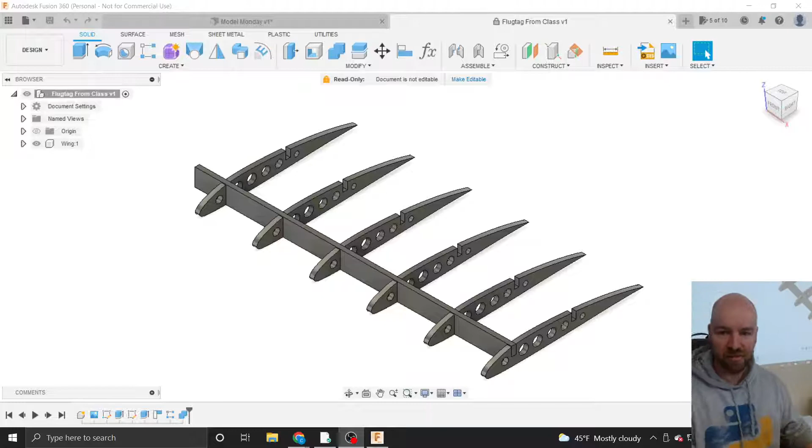Our project, which is part 2, the last part of our Flugtag wing design progress here. If I zoom out, you can see the beginnings of our wing. This is what we've got so far, where we ended up last week. This week we're going to finish making the second spar, make a wing covering, and then hopefully we'll have time to make the other half of this wing, because we've only got half of it drawn. Next week we'll start a new project.

So let's go ahead and jump right in. I'm gonna grab my Flugtag class project here, and we're going to go ahead and just get started. Sorry, did we have a question? All right, cool, so I'm going to go ahead and start.

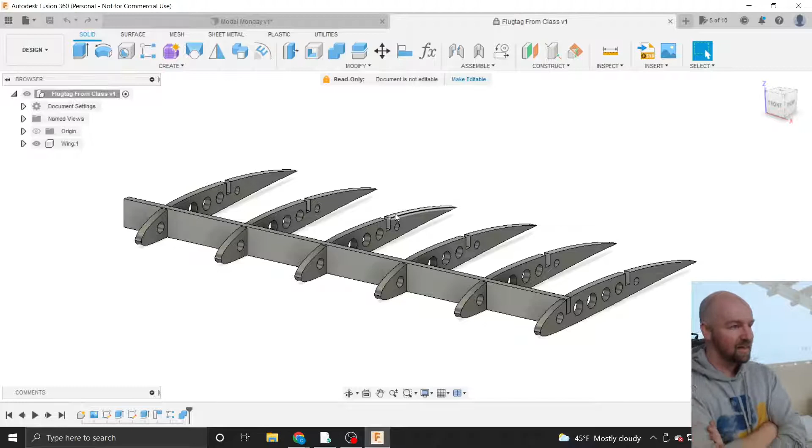Like I said, we're going to start by drawing the second spar, the rear spar for our wing section here, and we'll do that the same way we drew our first spar. So if you remember, we've got our wing component here. I'm going to go ahead and make my wing component my active component, that way any sketches or bodies that I make will end up inside of this wing component.

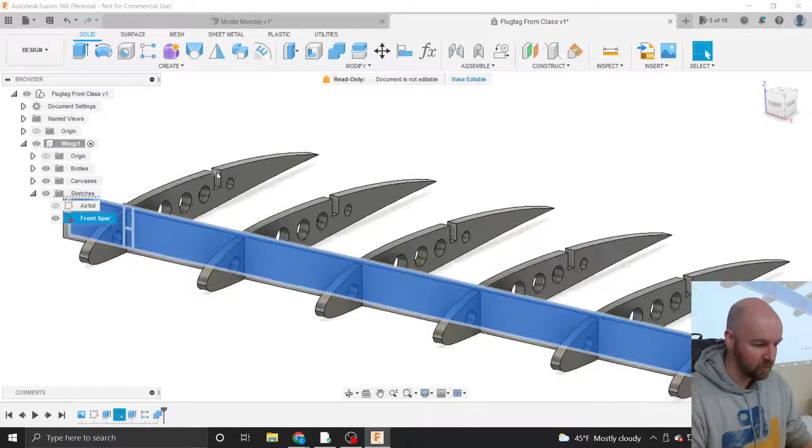I'm going to spin down and look inside of my canvases folder. I thought for sure I'd have a construction folder, but I do not. So we're going to go ahead and make the second spar the same way we made our first spar. Our first spar we just made as a drawing on one of these surfaces here, and we'll do the same thing here. So I'm going to go ahead and turn off my front spar.

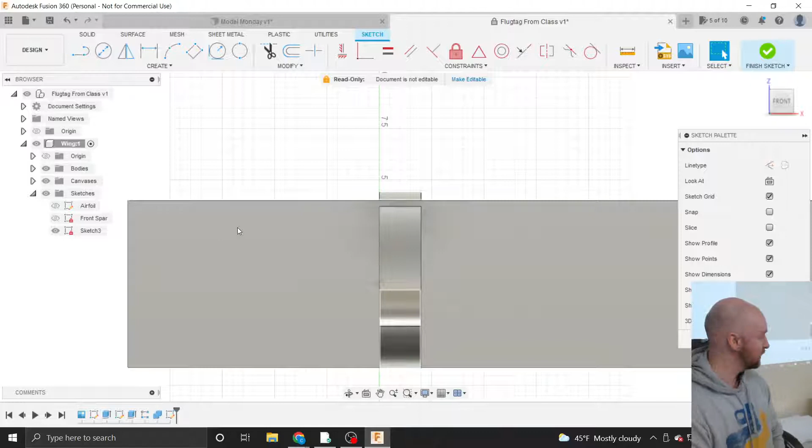To create a new sketch, I'm going to click on Create, and then Create Sketch. I'm going to hover over and choose one of these that doesn't have an origin floating right over it. There we go. If I zoom in a little bit, my origin was kind of covering the surface that I wanted to click on, so I had to zoom in so I could see the surface more clearly. If I choose that surface to draw on, it's going to spin me around so I'm looking down at that surface.

Now, I can't really see that surface because it's behind all of these bodies. So what I'm going to do is turn off the visibility on my front spar, which will make it a little bit easier to draw here temporarily. And I'm going to spin around so I'm looking at this a little bit more three-dimensionally.

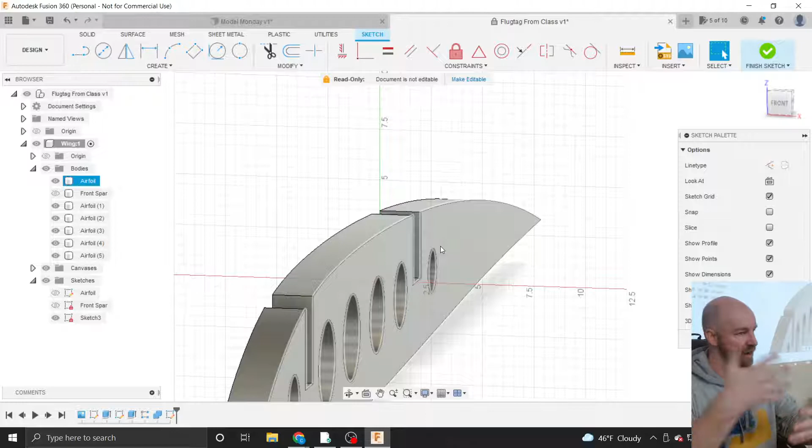What I'd like to do is take some of the existing geometry that exists here on our airfoil and project it over onto this drawing surface we're drawing on right now. I can do that with a command inside of our Create menu. If we scroll down to Project Include, and then that sub-menu that pops up, we're going to choose the Intersect command. One of the great things about Fusion 360 is it's got lots of tooltips.

So if you're not sure how to use a tool, these tooltips, if you just stop moving your mouse, will show you what it does, like projecting points or model edges. Oh, I clicked before I could finish reading. Face, is that right, on the back? I'm actually going to select the entire body.

I'll scroll over to this intersect option, and the default selection filter in this intersect window is set to specified entities. But if I change that to bodies, now I can project the geometry from this entire body all at the same time. So it'll bring over all the edges and points where this three-dimensional shape intersects with this imaginary sheet of paper, if that makes sense.

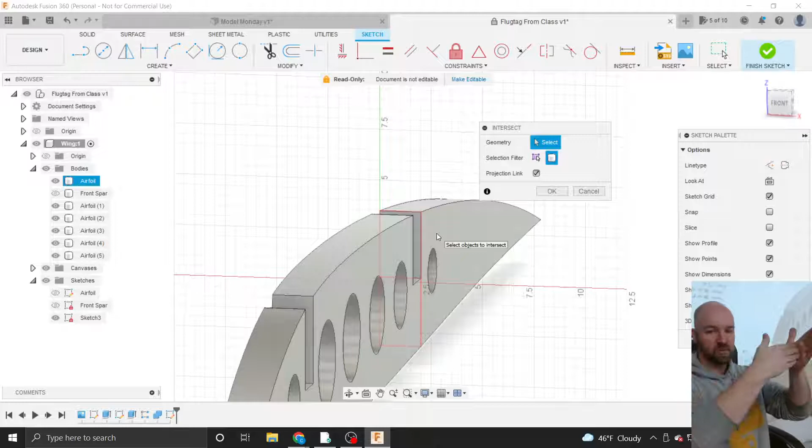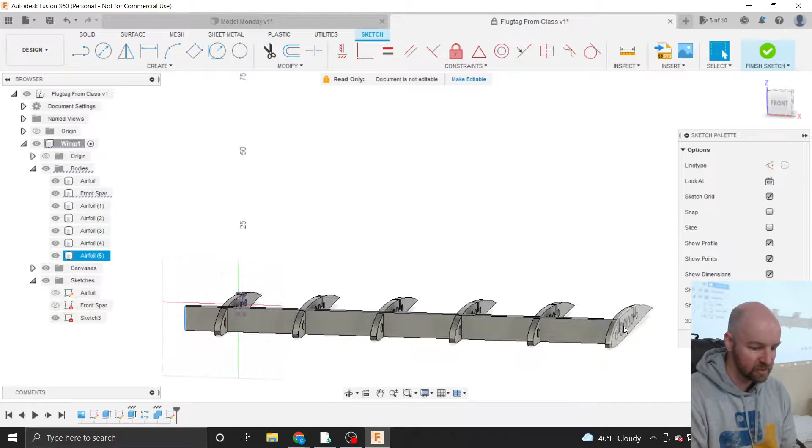So if I choose that body there as my geometry, and say OK, now I have all that geometry from my airfoil over there. I just need to get a little bit more geometry here. I already have this front spar that extends out a certain length near the middle of my craft, though it doesn't really extend out near the end of my craft, but I can use that existing geometry to project over the end points of what will be my rectangle.

I'm going to do that now, using that project command again. So from Create, I'm going to come down to Project, and then instead of Intersect, we're just going to choose this Project option.

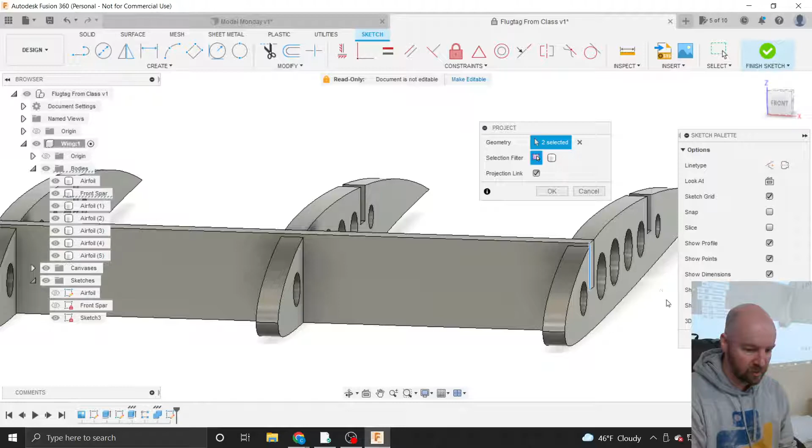If I choose this project option here, what I want to project are the ends of my wing spar. The center of my wing will be right here after we mirror this over later. So if I choose one of these edges here, it projects that line back. If I zoom out and zoom in on my other side, I've got another edge of my wing spar. That's kind of superfluous since it's right on the edge of our wing, so it's not really a necessary projection point, but it'll be handy. We do need to have some sort of end.

So do you project and do that on each side? Yeah, on each side.

Once we've done that on each side, I'll click OK, and then I'll show you if I turn off my bodies. I just turned off the visibility on my bodies, and now we can see just the projected geometry I've created.

This section here was where the airfoil existed that I projected over, and then this is one end of my spar, and that's going to be the other end of my spar there.

Now I just need to add a little bit more here. I need to draw a rectangle that will encompass the same width as my spar height at this location and the right length. I think I'm going to do this all using constraints, because I don't know how long this is, and I don't really know how wide this is. I guess I could measure, but it's easier to do this using constraints.

I'm going to grab from my create menu, and come and grab this 2-point rectangle option.

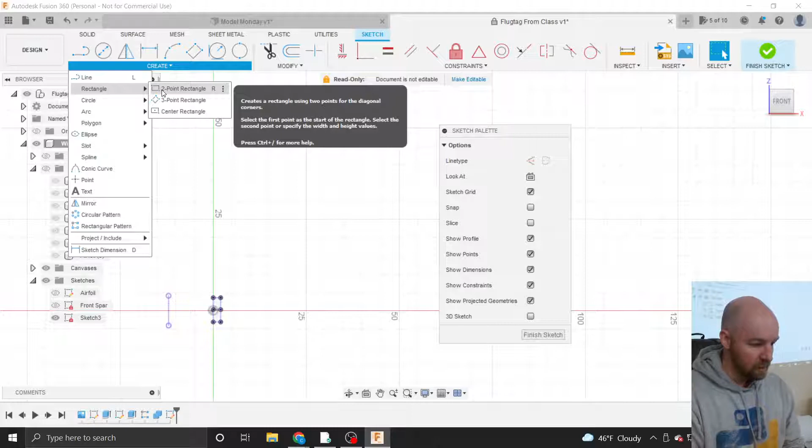How did you get to that drawing? To get to seeing this drawing, I just turned off the visibility on my bodies folder, since it's a little bit difficult to see what's going on there. I just turned off the little eyeball next to my bodies folder. Okay, and then I can just see my sketch.

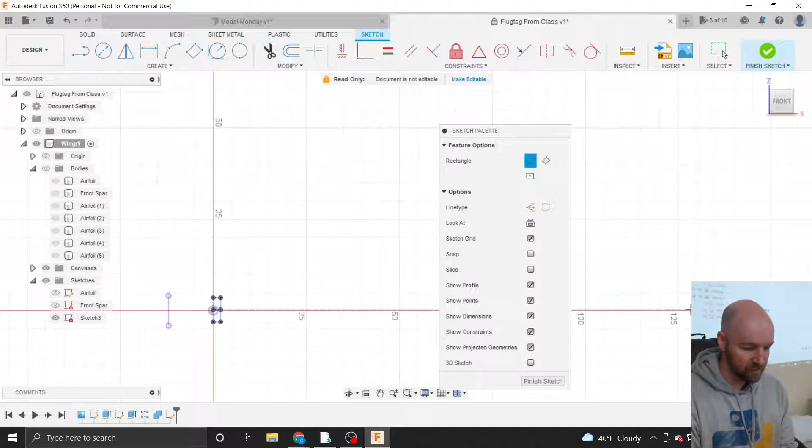So now if we come up to the create menu and choose the rectangle option, and come over to 2-point rectangle. Now I'm going to just do a really bad job of this because, like I said, I'm going to get it all constrained into place, but eventually I want my rectangle to be the same height as my spar and the same width as my front spar here. But I'm just going to do a really bad job of it right now and make my rectangle like that.

So I did not specify any height or width. I just clicked and placed the first point of my rectangle and then clicked and placed the second point of my rectangle. Normally I would encourage people to type dimensions in, but I think this is one of those few occasions where you'd constrain your sketch with dimensions, but here we're constraining it with existing geometry. Does that make sense? Yeah?

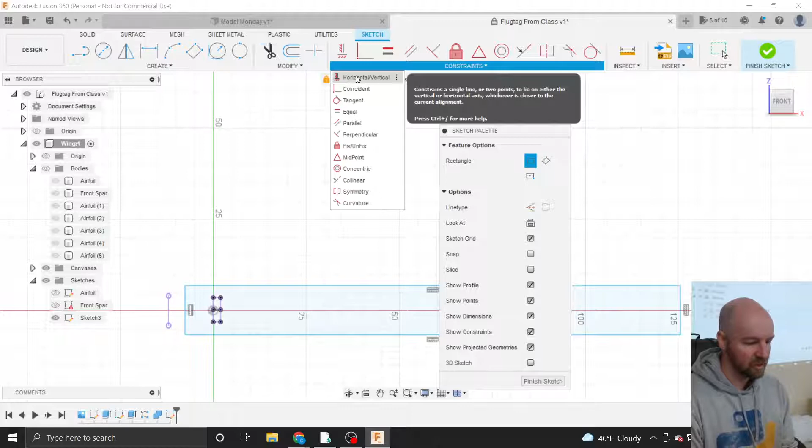So now we can use our constraints menu here, and I think I can get away with just using horizontal, vertical, or coincident. That will also work — I'll show you how to use both. The horizontal, vertical constraint will constrain a single line or 2 points to lie on either the vertical or horizontal axis, whichever is the closest alignment. So if I choose this horizontal, vertical constraint, I can zoom in here and say, hey, take this line and make it straight horizontal or straight vertical. Oh, it actually doesn't work. Coincident is what I've got to go with — I thought for sure I could use horizontal, vertical, but not really.

So I'll take my coincident constraint and click on my line at the top here, and click on one of the points at the top of my spar, and it'll go ahead and move that downwards. You can see now that it's constrained in a direction, it turned black, so now it's kind of locked in place.

I've still got my constraint tool handy here, so I can just keep using it. I can do that with the bottom of my line too — click on the bottom of my wing spar and then click on one of the bottom points that I projected over, and that will constrain that lower edge.

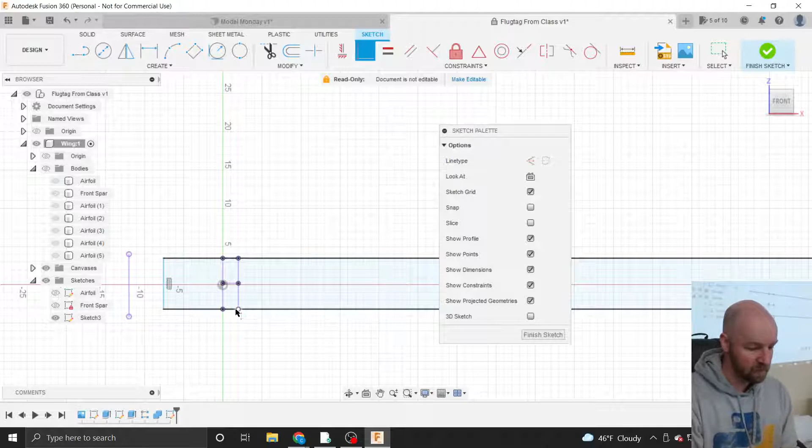And I'll do the same thing with the side here. I'll click on the point that represents the top left-hand corner of that rectangle, and then I'll click on the line that I projected over. This is the inside line of my wing. Now I'll zoom out and zoom in to the other side and do that one last time, clicking on the point and then the line. Now my rectangle is fully constrained here.

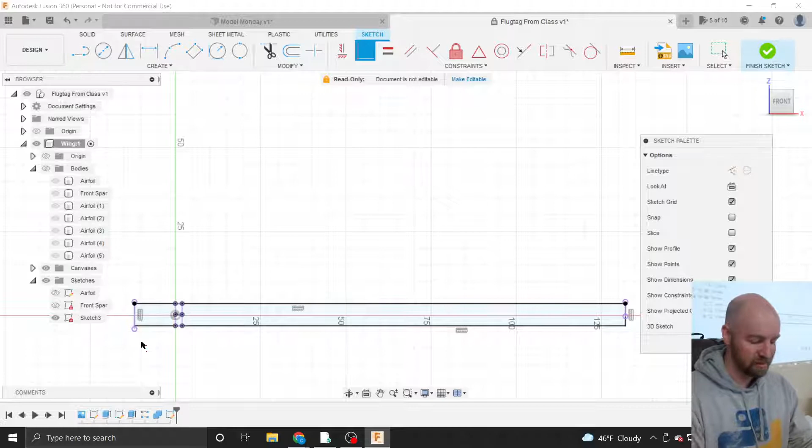So I talked a little bit about liking to have a bunch of black lines out on my drawing, because it means everything is locked in place and fully constrained, which is very unlike the airfoil we designed. But this is more like what we want a drawing to look like here. Nice and fully constrained, and lots of black lines is good.

Alright, if I go ahead and click Finish Sketch now, before I turn on my bodies, I'm going to extrude out this rectangle that I have made here. So from the Create menu, I'm going to go ahead and choose the Extrude option.

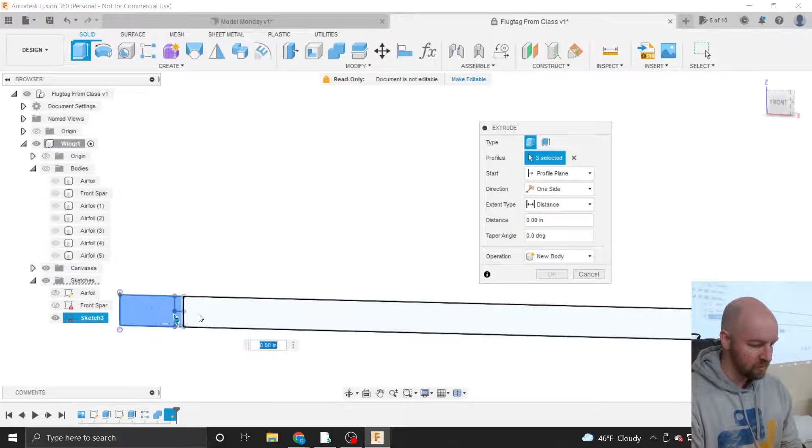And I'm going to extrude out all of, I'm going to select each one of the profiles of my wing spar here, and I'm going to type in a dimension of 2 inches.

I do this because I'd like to illustrate something. If you remember, we turned off visibility, so you don't see anything appearing in front of you here, right? That's because we turned off the visibility on our bodies folder. So we're making a body and the body's visibility is turned off. This is something I do quite often, and then I go, oh, it's not working. Oh wait, right, I've got to turn on that visibility of that bodies folder, and then I can see all the things within it.

The default operation that it's choosing for me, at the very bottom here, is defaulting to cut. And that's because, let's see, if I were to turn off all of these airfoils, turn off the visibility of them, now it's going to default to new body here.

So the way this works is when you're extruding something or revolving something, when you're creating a body of any kind, and that body will intersect another body that you've already made, it will let you choose an operation to do on how those bodies interact with each other.

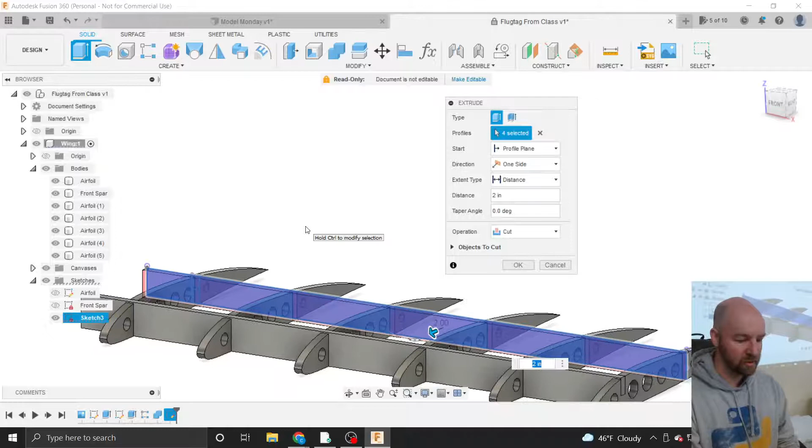So you can choose to cut away the body that exists with the thing you're currently doing. That's called a Boolean operation. So when you're cutting away from it, or you can choose to make this an intersection between the two bodies, or the 7 bodies in this case, 8. So we've got the intersection between the airfoils and the current thing I'm extruding, which are just these little teeny bits here.

Or what we actually want to do is make it a new body. We'll worry about cutting out the notches in the next step. So I just want to make this a brand new body and not join it or cut away or do anything like that. So I'm going to choose this new body option. I've got my distance set in, that's 2 inches, and I'm going to go ahead and say okey dokey.

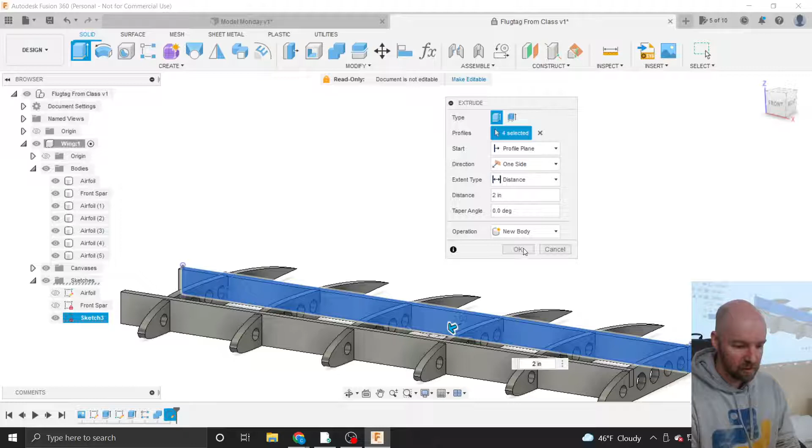Alright, so we have our spar made, our rear spar. However, it does not have the appropriate notches so it will fit into our airfoil. So if I turn off my front airfoil, my first airfoil there, you can see in the front spar we've got these little notches cut in, and that is because we've got matching notches in our airfoil already, right? So we can construct this in a way that it'll be fairly easy.

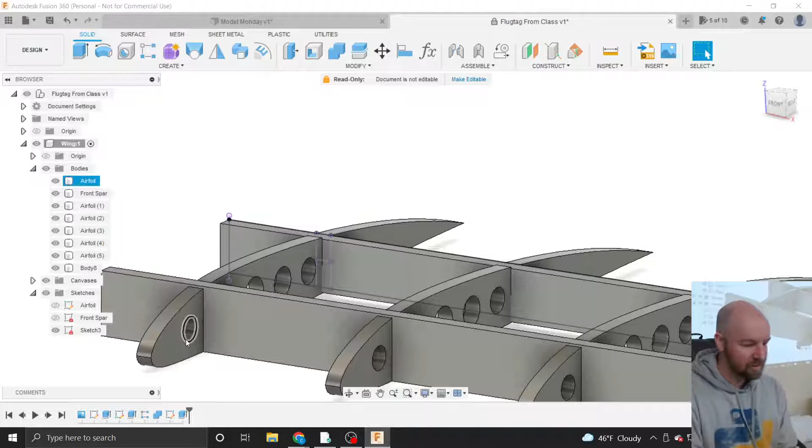To add those notches into the rear spar, I believe we're going to use the same command. So from the Modify menu, counterintuitively, we're going to use the Combine command.

So as I mentioned previously, there are several different operations you can do when two bodies are intersecting with each other. The target body in this case is the thing that we want to do the cutting from. I have to select a tool before it'll let me pick an operation here.

This is a new window. There used to be a drop down here in the combine menu, just like in the extrude command. This is new, a recent update.

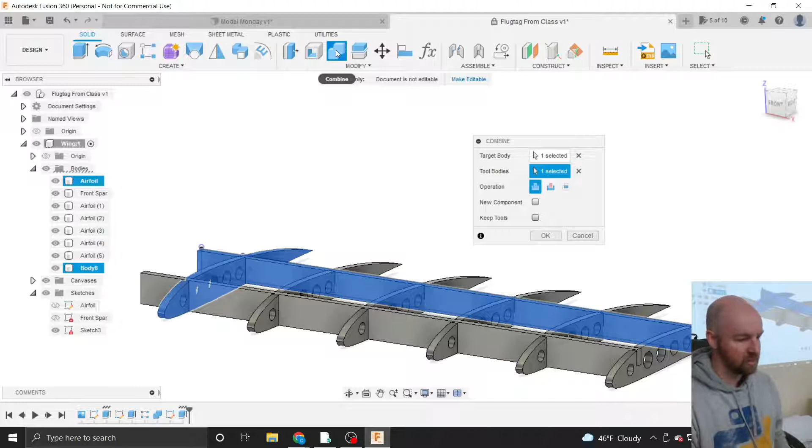So the tool bodies are the things that are going to be doing the cutting. The default operation here is join, because it's the combine command. That makes sense, but you can also use this as the cut command if you want to, so you can use one body to cut away from another body.

You can have more than one tool. We've got one target, which is our wing spar, and we're going to have more than one tool here. I can go through and click on all of them individually in my drawing view, or over here in my bodies folder of my browser, I can click on the first one in the list and hold down the shift key and click on the last one, and then I'll get all of my airfoils selected without having to click eight times. It's handy if you've got like 30 things that you're trying to subtract away.

A key thing we want to point out here is we want to keep our tools after we've done this operation. So if I choose this keep tools checkbox... actually, let me do it wrong first. If you don't have that checkbox checked, all of my airfoils have disappeared, in which case you should immediately panic and start from scratch.

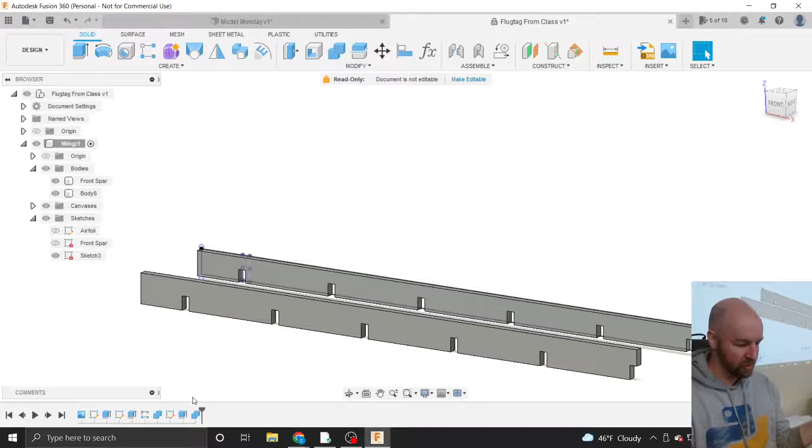Just kidding. The lovely thing about Fusion 360 is everything is parametric. So down here in our timeline, if I accidentally go 'oh, all my airfoils are gone,' I can right-click on that and say Edit Feature, and now I go back in time to when I was doing this operation. I can say, oh, I forgot to click that Keep Tools checkbox. So now when I say OK...

Now it keeps all my tools. But we can see if I turn off that airfoil, now I've got that nice little notch. That same notch is notched into the back there.

Alright, so we've got our airfoils drawn here, we've got our spars. I've got one body to name here - this is our rear spar. And just as housekeeping, I'm going to go ahead and name this sketch. I probably should have been better at naming this as I was going.

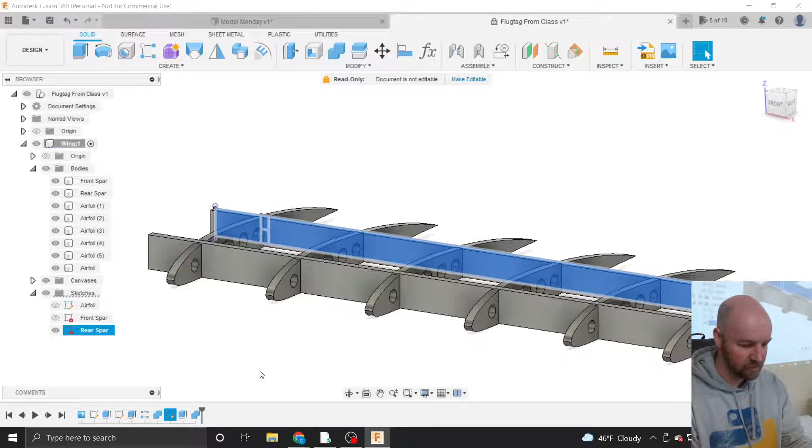You long-time joiners here will know that I like to name my bodies and my sketches. I pretty much name almost everything. Just as a tangent, you can name the things down here in your timeline too, if you really want to get crazy with naming things.

I can go ahead and choose - so right now this combine is just called combine 2, but I can choose to rename that as rear spar notches.

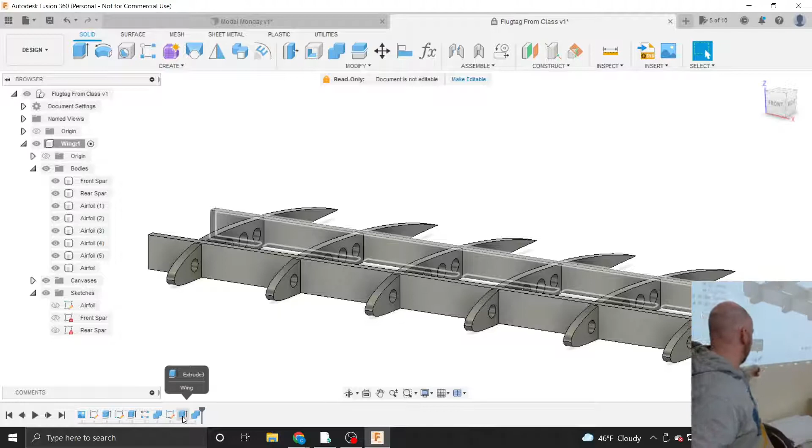This is super handy if you need to share a drawing with somebody else, right? And they need to change something about your drawing, they need to go 'oh yeah, I need to change the thickness of the rear spar,' and I can do that if I know which of these icons I need to click on. So if you change where I made that rear spar, this is my rear spar extrusion.

Now they can go down here and just hover over that and go, 'oh, there's where they made their rear spar extrusion. I'm glad Carl named that for me. What a well-organized person he is, and a model example for everybody in their Fusion 360 use.'

Just crickets. All right, cool. Appreciate you. All right.

The next thing we need to do here is we need some sort of wing covering. And to make our wing covering, I think we're going to leave the comfort and relative peace of our solid working environment up here at the top, and step into the crazy tangerine-tooled environment of our surface workspace here.

A surface is fundamentally different than a solid body. Surfaces, they still call them bodies, but so far the things that we have drawn are objects that have mass, I would say - they have a length and a width and a height. It's like a block or a brick that we've made.

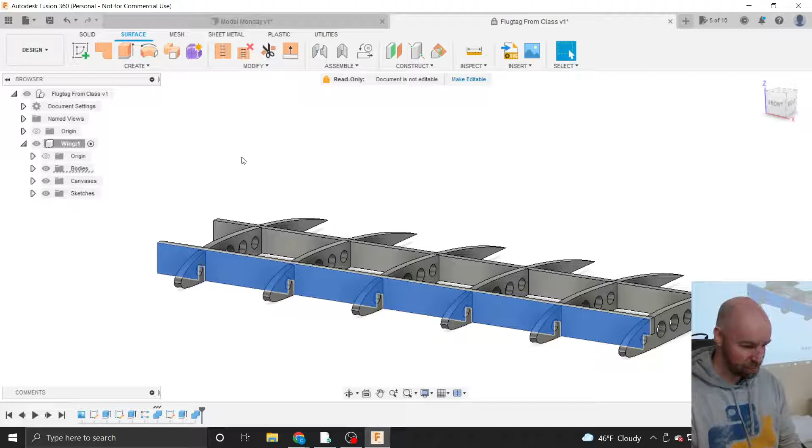A surface has a height and a width for sure, but not necessarily a thickness. So a surface you can imagine as just like a sheet of paper. And we're going to draw our wing out of a sheet of paper. So surfaces don't really have any thickness, but you can give them thickness later. We'll just go ahead and jump into this and give it a try.

So I'm going to turn on my airfoil sketch. And I'm going to choose to hide all of my bodies again, because they're just kind of in the way at this point.

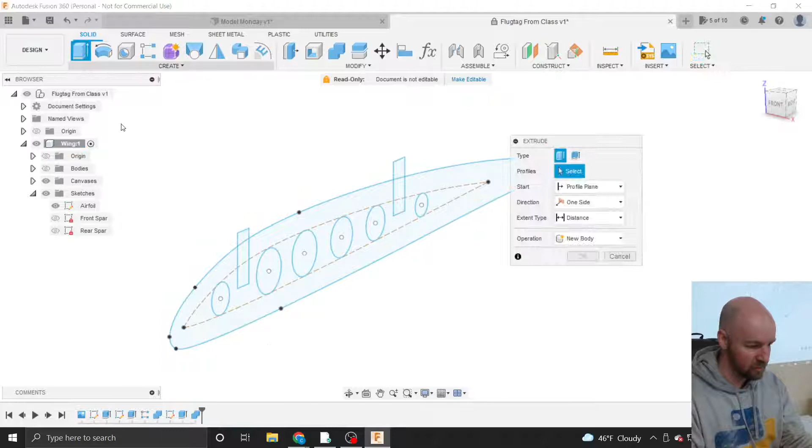So normally, when we're in the solid environment, we can click on... that's interesting, I don't want to let me. Do I have to turn my bodies folder on in order for it to be visible? If I choose to extrude, yeah.

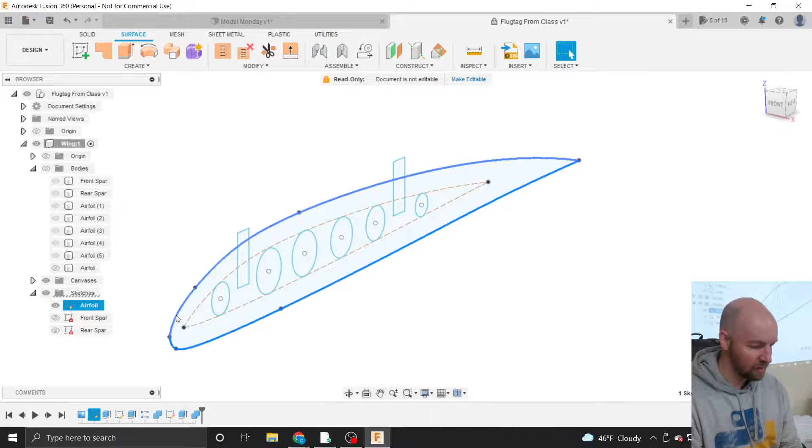So it'll let me highlight an area that is surrounded by lines, like a fully enclosed shape. In the surface workspace, we highlight the lines and not the bodies. So I'm going to go ahead and turn off my bodies folder here again. So instead of the bodies, I'm going to pick on both of the... that's interesting.

I haven't chosen Extrude yet. I'm going to go ahead and click on Create, and then I'm going to choose the Extrude here from the surface area. Make sure you've got an orange tangerine extrude tool here because we're in the surface area. And now, there we go.

Now it'll let me pick that outline that represents the outer edge of my airfoil. And if I expand that in, again, we will see nothing because I've turned off the visibility on my bodies. So I'll go ahead and turn that back on.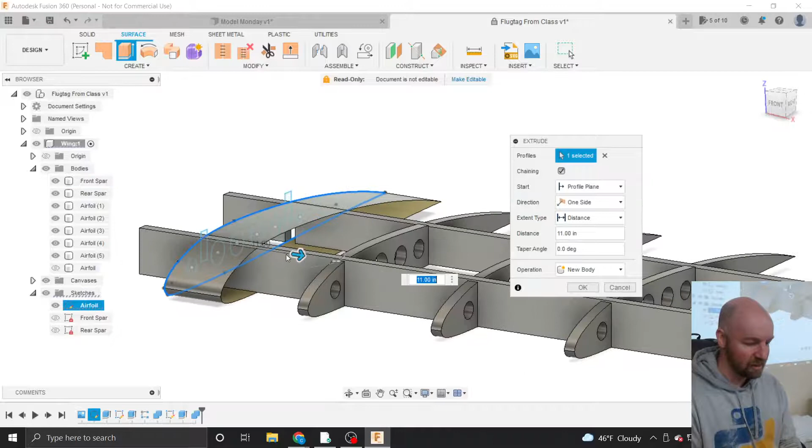And I'll just kind of extrude out this little surface here, so you can see what I'm saying. It looks like this surface has some sort of thickness, but I assure you it is a completely zero-dimensional thing. It's showing you that it has dimension, but it really doesn't have any thickness. That's kind of a hard thing to wrap your head around. It's like, hey, hands are crazy, man.

Alright, so I'm going to choose to extrude this surface with an option that I don't think some of you have seen yet. So from in our extrude menu or window here, there is a direction option. And normally one side is a great thing to choose.

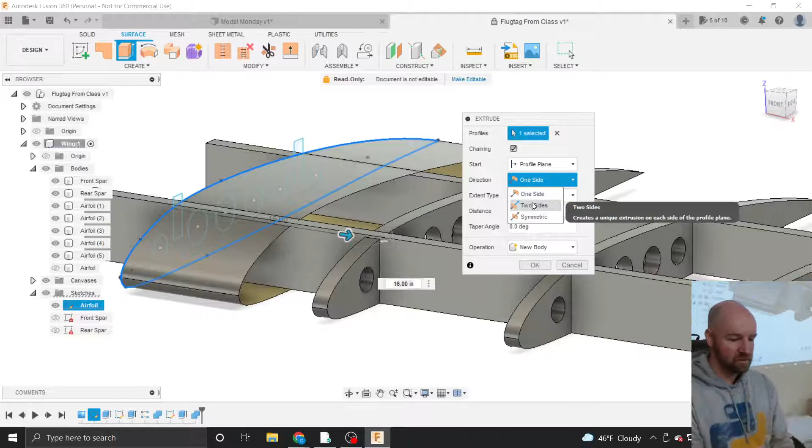But in our case, we actually want to go out two sides in different directions. So symmetric would go out on either side the same amount, the same distance. But if I choose two sides, then it gives me two arrows, and I can drag out each arrow a different amount. I can also, instead of specifying a distance for each side, for side 1 instead of distance, say, hey, I want to go to an object.

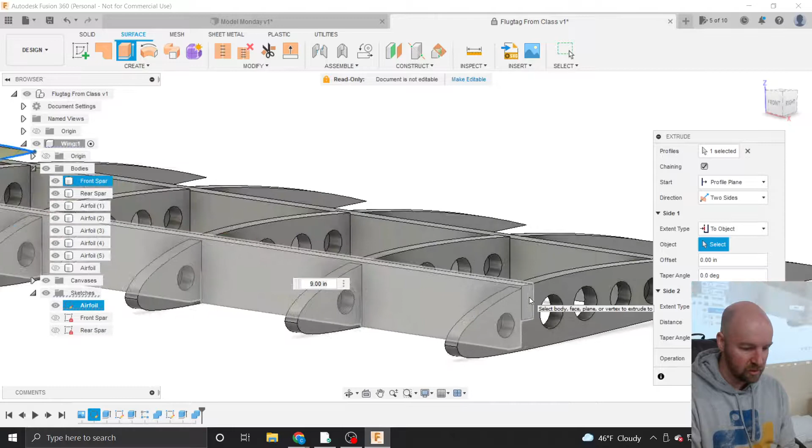And if I change that to an object, and then I choose as the object that I want to go to the end of my wing's spar, it'll extrude out all the way to the end of that wing's spar. And if I rotate around and choose this other side, side 2, I'm going to change that to object as well. And now I'll zoom in here so I can click on the other side of my wing's spar there.

Now I've got a nice little sheathing there, and new body is indeed what we want to do here. And I'm going to go ahead and click on OK.

Are you guys following me at home? How you guys doing?

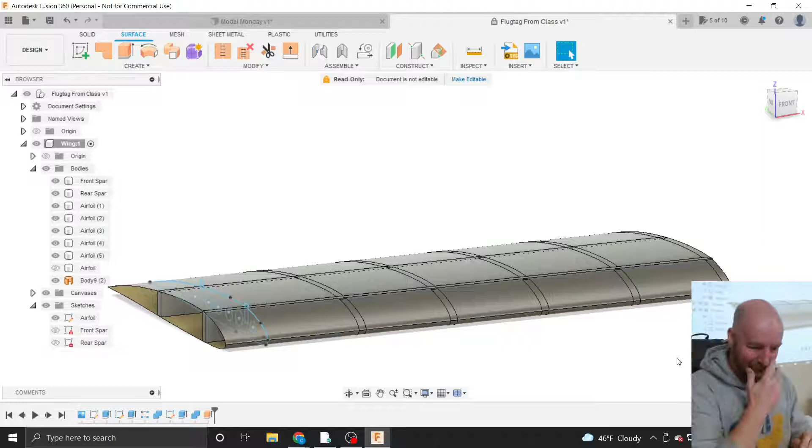How did all of the rivets end up in there? Mike, if you want to draw rivets, we will 100% draw rivets. You extruded, and all of a sudden they were there.

Oh yeah, it does kind of look like rivets, but really, it's a weird artifact. Mike was just pointing out, if I zoom out, there's some weird dotted lines going on there, right? And it's because this surface has no thickness. The outside of this surface, or what we see as the outside, the gray part, is at exactly the same place as that corner. So it's showing the line that technically exists at that point.

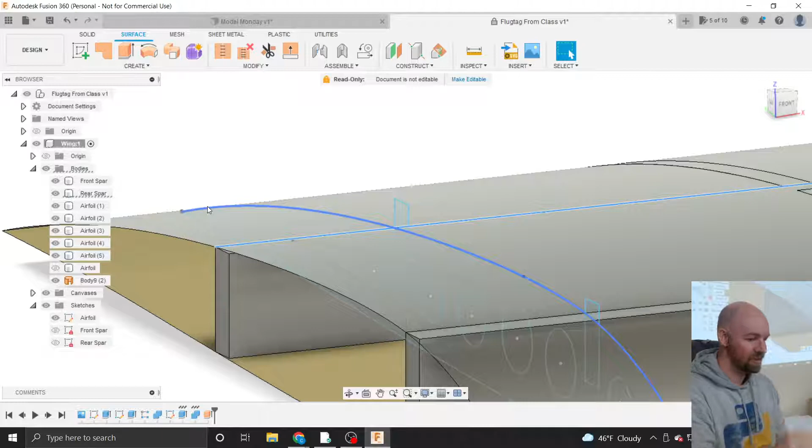If you have a very thin surface, which we're about to have, you'll probably still be able to see through our piece until you zoom in. When you back up, the rendering in Fusion doesn't try as hard as when you get closer. That's why you see these lines too, since they exist on the same place on this surface. The inside and outside really exist at the same place because it has zero dimension.

Anyway, so it's a mind-blown kind of thing. So the next thing we want to do is give our surface a name. Let's go ahead and name it. This is our wing covering.

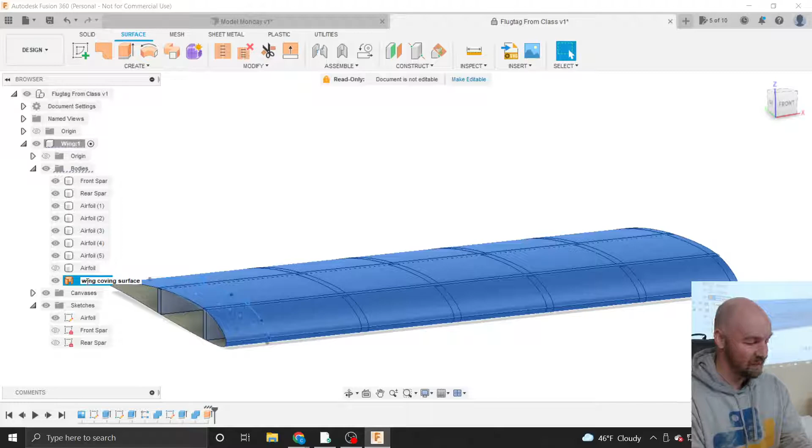I'm going to call it my wing covering surface, because from this body, this surface body, I'm going to actually create a thick, real body here.

Maybe something I'll just mention briefly is it doesn't really make a whole lot of a difference. Well, it kind of does. This surface has a gray side and a yellow side. The gray side is the outside of that surface, and the yellow side is the inside. If you import this into some other software and start doing stuff with it, you'll find that makes a difference.

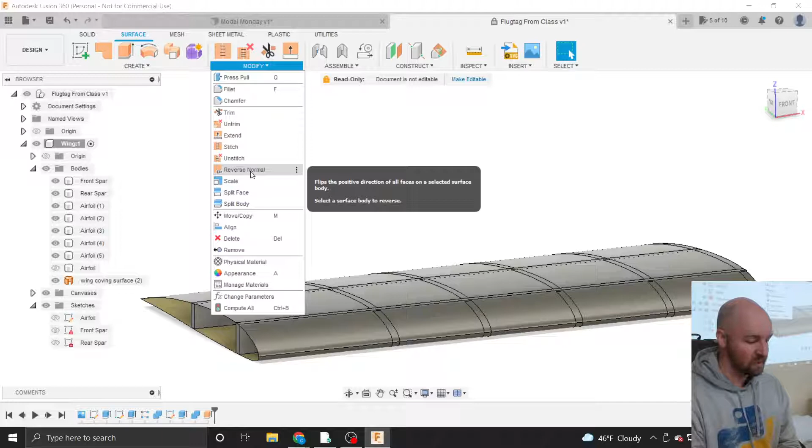Also, for this next step, which we're going to choose here, that will make a difference: we're going to choose this thicken command. But if for some reason you have the yellow surface for your wing on the outside, there is an option you'll want to find called reverse normal. So if you're ever working with surfaces and your surface is inside out, you can choose from the modify menu this reverse normal, and it will flip that surface.

Again, this is what it would look like if it was inside out. So I'm just going to go ahead and—is that a reverse normal feature? It is a reverse normal feature, so I'm just going to delete this feature from my timeline, because gray is what you want on the outside.

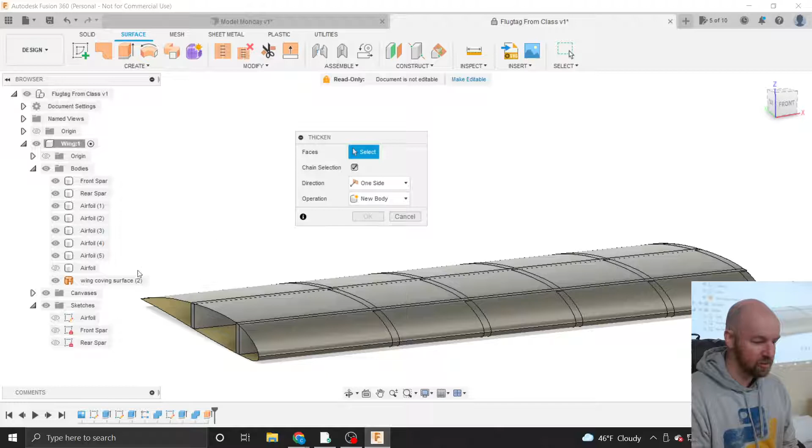And that makes a difference, because when you choose something like the thicken command, which we're going to do right now—if we choose create and then thicken—now I'm going to choose not to pick the face I want to thicken by clicking in my drawing environment, because this is actually more than one face. It's much easier to click on the surface you want by clicking on it in the bodies folder in your browser.

So if I choose here out of my drawing view, you can see I've really only gotten half of it—I've only clicked on the top, not the bottom—and then I have to click on two faces, whereas here I just need to click on one body, one surface body, and now the whole thing is highlighted.

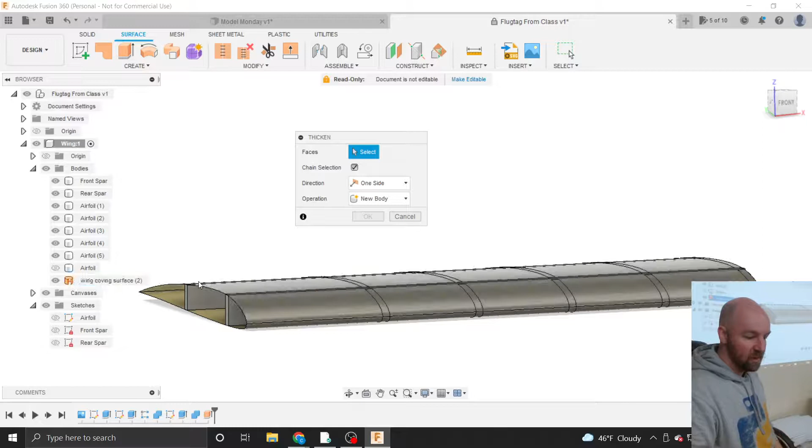What was that option again? That is, in the create menu, there's a thicken command. And then how do you get all the bodies at once, all the faces at once? So instead of choosing it from the drawing environment, if you click on and highlight the body in your bodies folder—here's my bodies folder in my browser—if I choose it that way, it should highlight the whole thing. And thank you for the question.

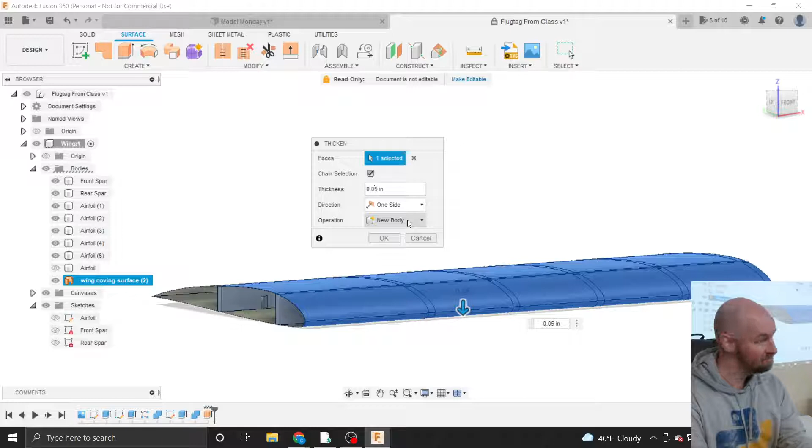All right, so now, similar to a lot of commands like the extrude command, we need to give some sort of thickness here. A wing covering is super thin. So, what do you think, Mike? 5 thousandths? 10 thousandths?

Yeah, so I'm going to go with Mike's recommendation of 10 thousandths. Or is that 100 thousandths? That's 10 thousandths, right? 0.01 would be 10,000... 0.01, okay, cool, thank you. So 0.01, a real thin body, but a body nonetheless.

And just for reference, you could make this as thick as you want to. So if you happen to have a weird curvy shape and you want to make it, this is how I would recommend doing it—starting with the surface and then thicken. Just because there may or may not be somebody in here in class who could use that particular knowledge. No, you're good. All right, cool.

So, new body, and here is where that normal side—that gray and that yellow side—becomes important, because we are choosing.

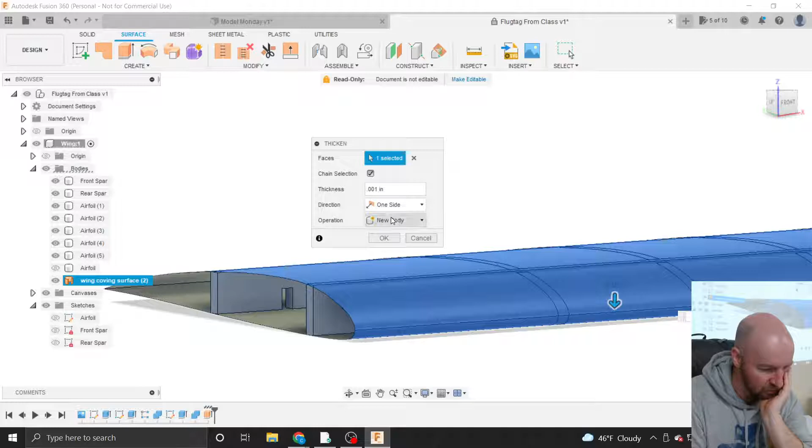I guess you're not choosing, you're choosing one side. But I'm gonna make it .001 inch.

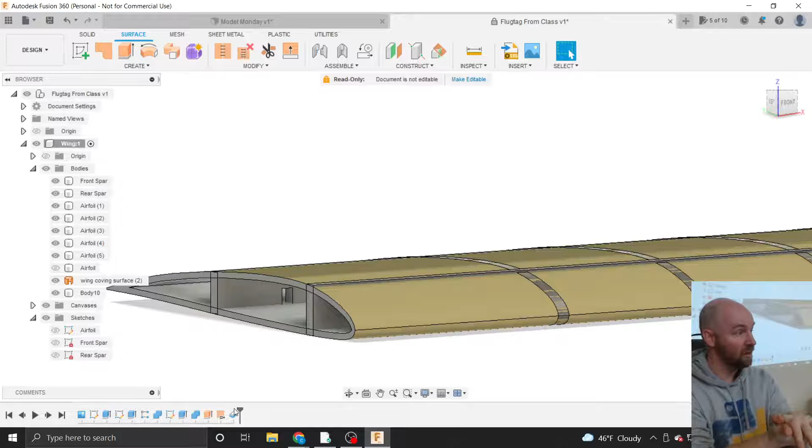If it were inside out, I bet it would go the other way, and I'm just going to test that. So I'm going to click OK here, and then just as a test, go back in time in my timeline and find that reverse normal option. Again, you guys don't need to do this, I just want to illustrate: if my body is inside out and then I do my thicken, it thickens in the wrong direction. So having that normal in the right way does make a difference.

All right, so I'm just going to undo a couple of times, and then come into the present, and then...

1/10,000ths, that much. 1,000? That's 1,000. I thought you were putting in 10,000. So 0.01, is that what we're thinking? 0.01, it's 10,000, yes. 0.01. Okay, cool.

10,000ths. All right, and new body. And I'm gonna say okay.

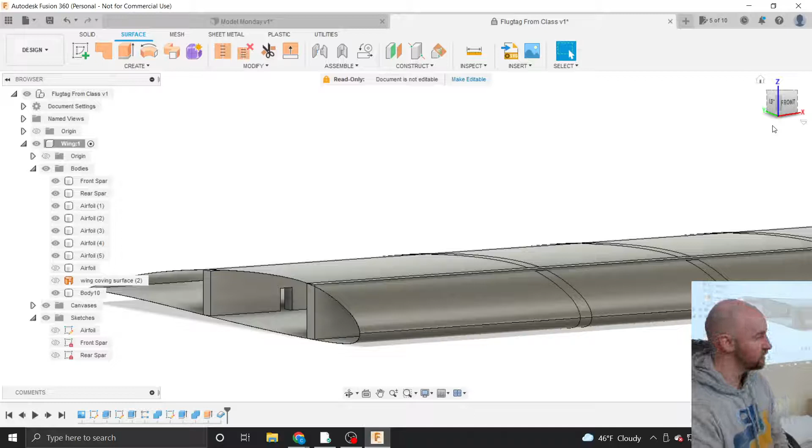So I'm almost done here, we just have a little bit of cleanup to do. Our front spar sticks out over our wing surface, and that ain't cool.

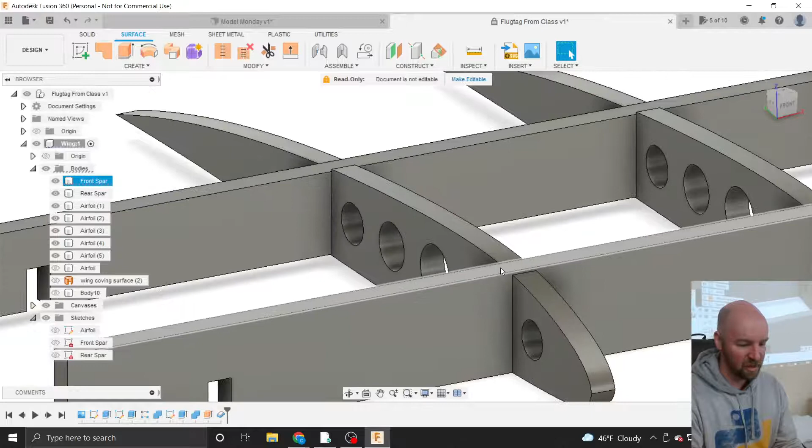So we're gonna need to cut away that little corner of our wing surface here. I guess the real way to do this, if we were actually trying to make this wing, would be to just extrude this bit down a little so it does not protrude over our surface, because the way I'm going to show you will make a very difficult to manufacture wing. But we don't got to make these, so we can make them hard to make, and let the engineers yell at us.

Go ahead, Mike. Carl, couldn't you jump to the surface menu, choose the profile of your airfoil, extrude, and choose cut from the options? Yeah, definitely. Similarly, alternatively, you don't need to extrude out a new surface because we already have one, and that's the suggestion I was going to make here.

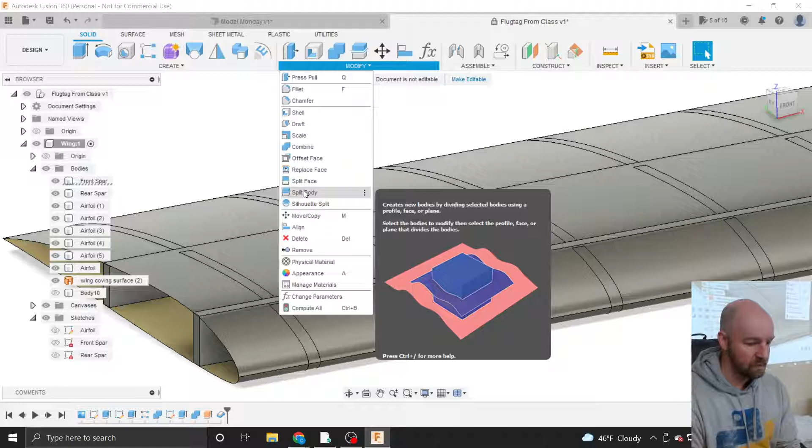So if we switch back over to our solid working space here, there is an option called split body. Normally, splitting a body involves using a construction plane of some sort - at least in the past we've used a construction plane to split a body in two. But you can also use a surface to split a body in two.

So the body that we're going to split here is the front spar. I'm just going to choose it from the bodies folder in my browser, this front spar. Another good reason to name things is because I just have to read and then I can click on it. Our splitting tool is going to be this wing surface here.

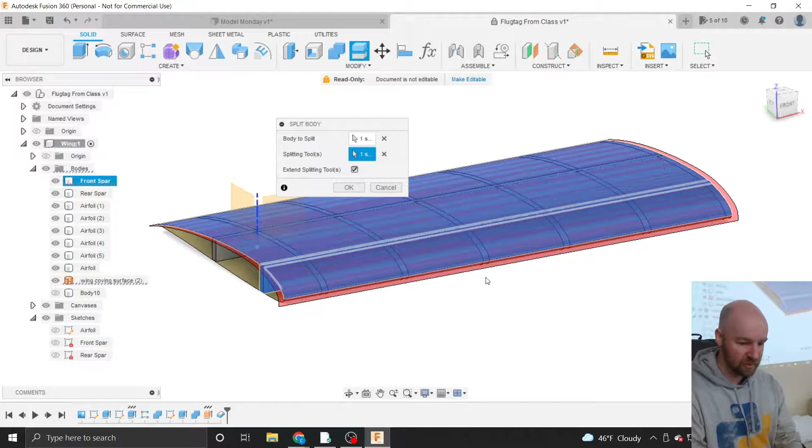So if I choose that as my splitting tool, it kind of extends it out a little bit in each direction - you can see these red lines or red surfaces extending out there. It's doing that because I'm telling it to extend the splitting tools. I think that's a good practice, but it's not necessary, I guess. But I'm going to do it in this case. And I'm going to say OK.

And now it doesn't look like much has changed. However, if I look carefully, I have two bodies that are called front spar over in my bodies folder. I can just turn off the visibility on that one, and you can see that it took down our corner.

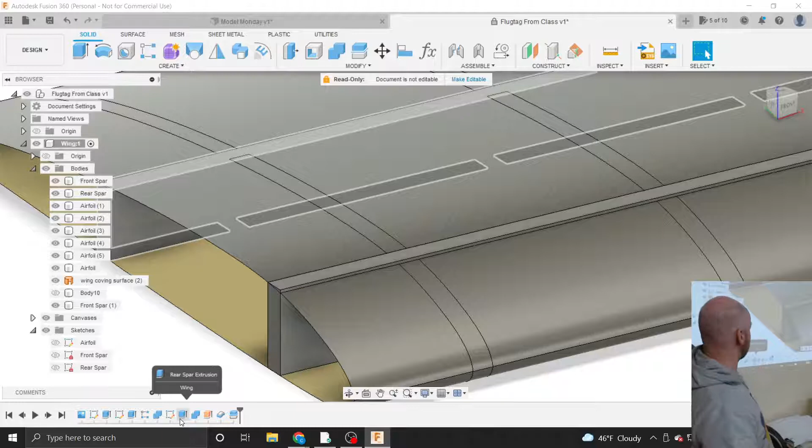I almost never delete things in Fusion 360. It causes problems in the timeline. If you delete something, and maybe something you've done depends on that body being there - like if I had created a sketch on this surface and then I delete it, so the surface no longer exists for my sketch to live on - then, you know, Marty McFly's hand starts disappearing.

So the method I would always go with in this case, since I don't ever need to see this ever again, is just clutter. The method I would always go with for getting rid of a body would be to right click on it and choose the remove option.

So if I choose that remove option, it sticks another icon down in my timeline, and now I can go back in time. So it's not there right now, but if I really needed that, I could go back in time to where it existed, or I could delete that remove, which sounds weird. I could delete the remove, and then that body would reappear. So if at some point in the future I'm like, oh, I really wish I had that surface to draw something on, I could remove the remove or delete the remove. But...

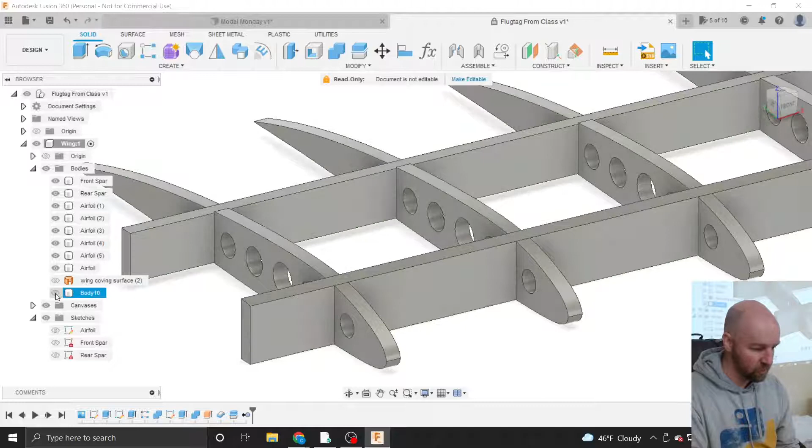Oh boy, look out, holy cow, panic. All right, cool. So we don't need our wing covering surface anymore. We do need our wing covering. I'm going to go ahead and name that body my wing covering, or you could call it, it's my, whatever you're covering your wing with, like MonoKote or UltraCote or whatever kind of coat, winter coat. Cool. So there's our wing, our nice sturdy wing here.

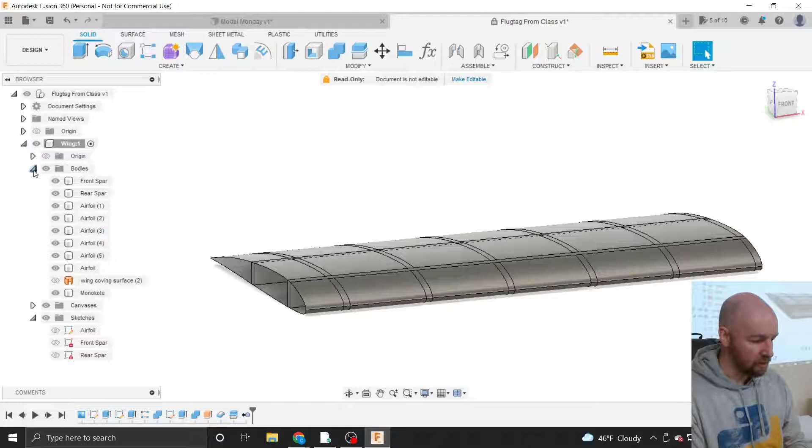With the last couple of minutes here in class, I kind of want to talk about some new stuff that I've been learning. So let's go ahead and mirror this wing, because we've only got half a plane right now. I'm going to close my bodies folder, close my sketches folder, and go back to making my Flugtag main document component my active component. So now I'm kind of outside of my wing component, and I'm doing that because I want to make a mirror of this wing component. So we've got half of it, and we can make the other half.

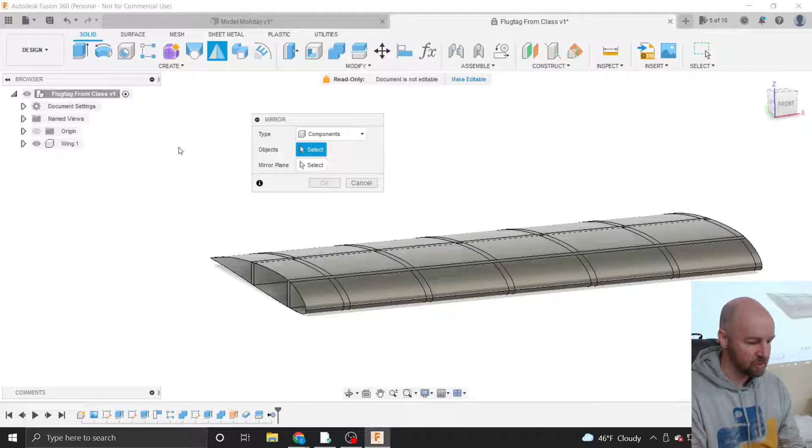If I choose from the create menu, I come up to this mirror option, and now the mirror type that I want to make is not of a face or a body or a feature, it's of a component. So I'm going to choose that component as my type. I'm going to pick the component that is my wing in my browser. And now as the plane that I'm going to mirror that across, I'm just going to zoom in and choose one of the sides of my wing spar, like that front wing spar there, right in the middle, or what I imagine as the middle. And then it goes ahead and duplicates that over there. So now we got a wing there.

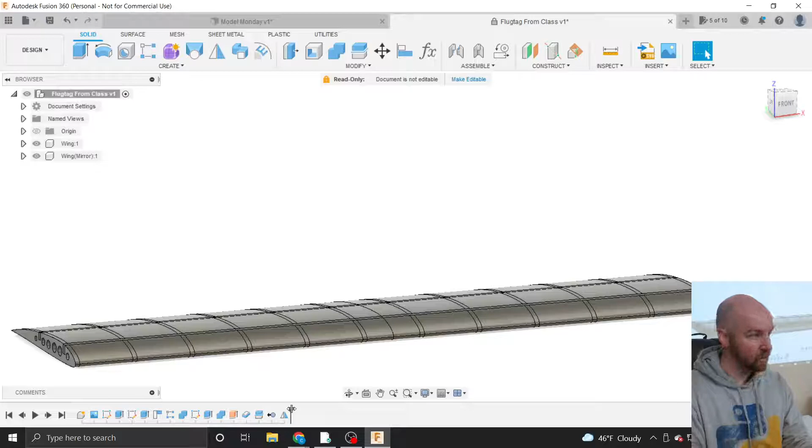Now something else that I'll mention is we have been going through this Flugtag design process, designing a wing on Mondays, because we're going to do this competition that's coming to Milwaukee, right? So one of the things that people have said is, oh, if you have a wing that's at an angle like this, then it's a little bit more easy to handle. It flies a little bit easier for whatever reason, because aerodynamically, if it's tilted off in one direction, then this wing is going to get more lift than this wing over here, so it's going to kind of naturally make it stabilize.

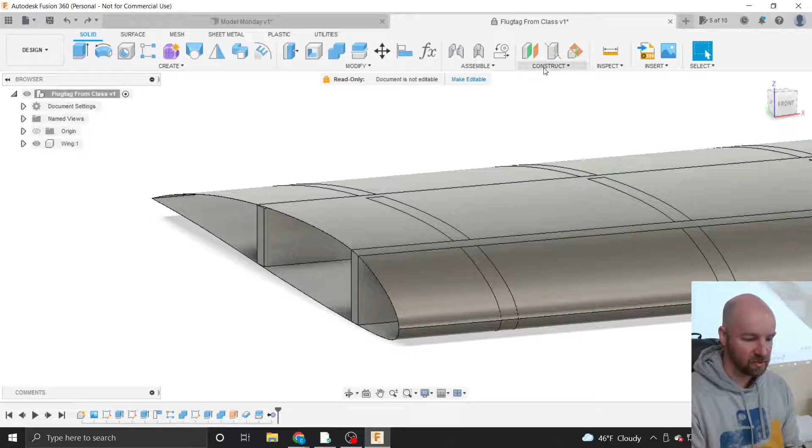So something we could do here is make a mirror plane that's at a slight angle to this plane here. If I, from the construct menu, choose this plane at an angle option, I'm going to pick the bottom edge of my wing spar as the line that I'm going to make an angle from, and I'm just going to tilt it. I guess that would be 90 degrees, but I really only want to tilt it like 5 degrees. So I'm going to tilt it off to 95 degrees there and say enter.

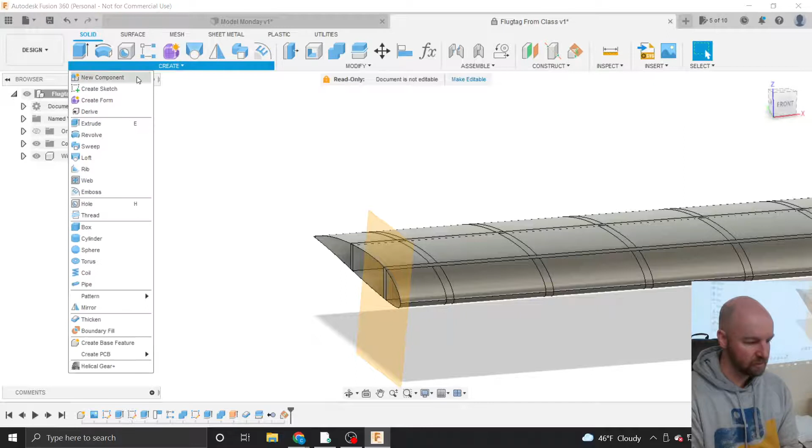And now, if I choose my mirror command, I'll come up and say create, then mirror. I'll choose the wing component, and I'll choose that mirror plane, which is that angled plane I just picked, and say OK. Now I've got a nice, I think they call that a dihedral, is that right? Now I've got a nice dihedral on my wing surface here.

The other thing that I've been learning about here in Fusion as I go down this plane-making rabbit hole is sometimes it's really handy to know how much things weigh. Well, what's the mass of a thing? And Fusion can help you with that. So we have in the past chosen appearances. From the modify menu, you can come down to this appearance option. And I think this is really handy for helping keep things visually organized.

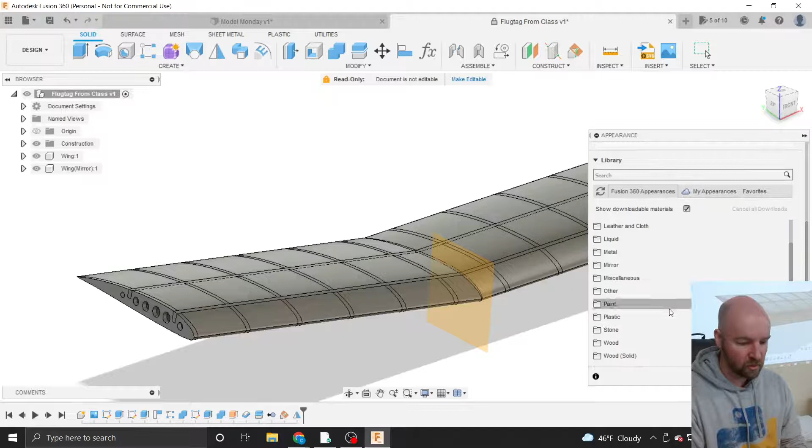So if our wing is made out of clear plastic, it's like transparent, and I'm just going to go ahead and call it acrylic. It's just visually for the look here. It's interesting that it's not showing through.

It should be becoming transparent, but I'm just curious if... Oh yeah, that's kind of fun. So here, let me do it to the other side, and you can see why I went.

How come that's different? So I dragged this appearance over this body here, which is my MonoKote body, on this side of the wing. This is our mirrored side. And apparently when I mirrored it over, it turned back on the visibility of my wing covering surface. So if I just turn off the visibility of my wing covering surface... I don't know why it turned that back on when I mirrored it, but I guess it was just showing me that it mirrored even things that I wasn't looking at. So that's kind of handy.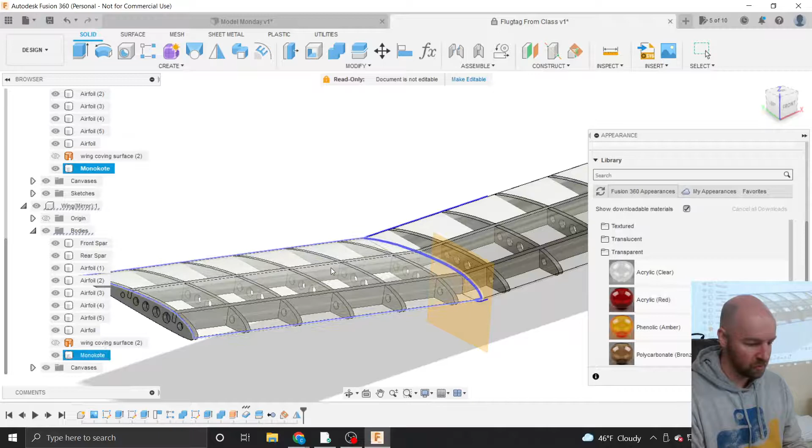So we know we can do this. We can change the appearance of things, but you can also give your bodies a physical material. Fusion knows how big this is, how big your objects are, how much volume they take up. So if you come down here from the modify menu, instead of appearance, you choose physical material.

Now we've got a whole slew of actual materials that you can apply to this body here. So for example, this airfoil over on this side, let's say you are making a much smaller plane and you are making it out of birch, which is maybe a fine wood to make a plane airfoil out of. So if I just drag over this birch on top of this, it applies that material to the body there.

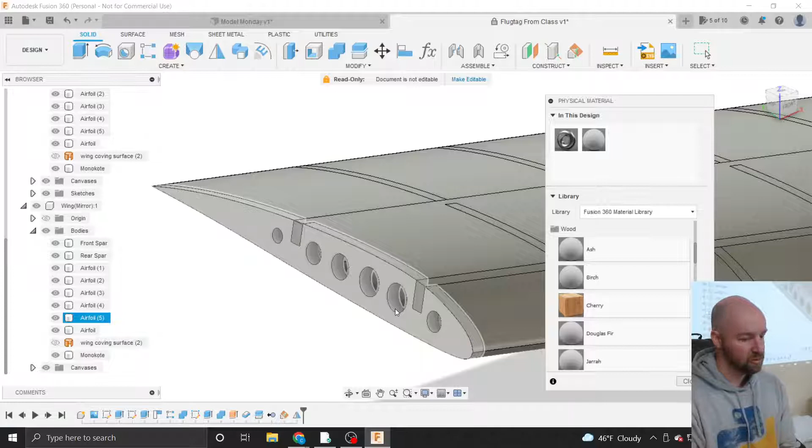And here I can actually double click on this too and find out information. Did I double click on it there? No, up here. So I double click on the physical material. This is the physical materials that are in this design. If I double click on birch, it says it'll give me the exact ounce mass per cubic inch of that birch. And if you wanted to, you could change this.

So if you got some birch and you weighed it, this is my custom special wood - you can name it something there. I'm going to say done here. So now that's your custom special wood, and you weighed it. Turns out your birch is amazing, and it's a whole 0.1 ounces per cubic inch less heavy than it will be. So you can make custom materials, which is nice.

I can also right click on this and say duplicate, and now I've got another material over here. So if I've got, this isn't birch now, this is maybe my, what do they call that pink foam? It's expanded polystyrene or something or other. We'll just call it pink foam, pink insulation. And then you go out to the internet and you find out how much pink insulation weighs per cubic inch, and you enter that in here. Let's say it's light, it's pretty light. It's called 0.05. And I'm going to put that on a different body. So here's my pink insulation.

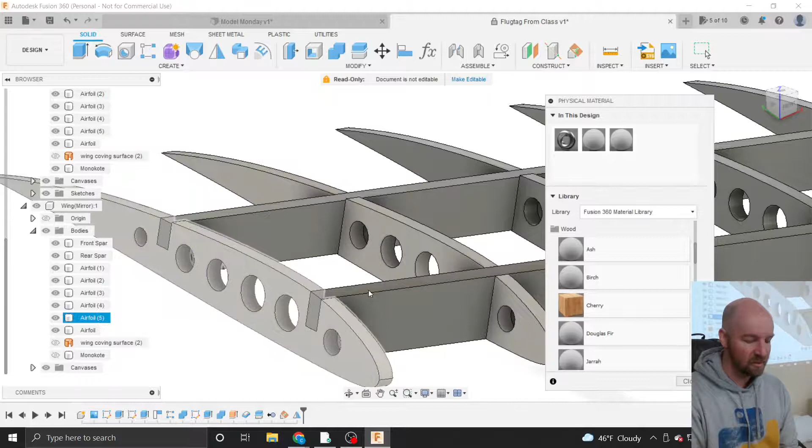Something you'll notice, they don't look different. So the only way to have things look different that actually are a different physical material is by changing their appearance. So we do have to go back to that appearance option and find - here's the, I don't even think birch is an option here, but you know, call it oak, so hey, it's just something wood. We got in the right family, maybe not in the right ballpark, but definitely in the right family. And then let's just go with paint - no, let's go with plastic.

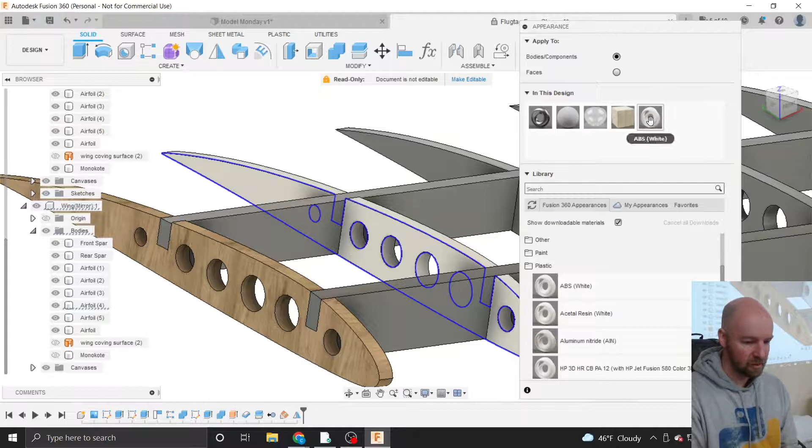And I can make a pink plastic. So I'm just going to drag that plastic out onto this other one. And now if I double click on it up here in this design option, now I can find myself a nice color for my pink insulation foam and say done. Now it's just the appearance, so it doesn't affect the physical material at all.

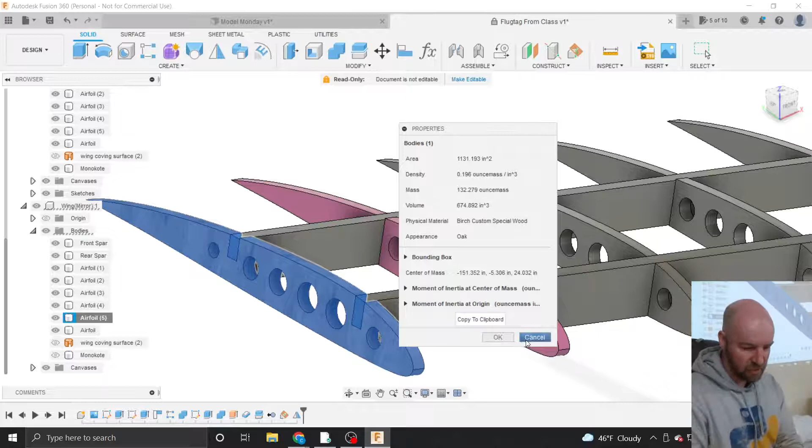But if I want to find that information, so if I want to go, hey, how much different in weight is this birch airfoil? If I right click on the body in the bodies folder, I can say properties, and now it will tell me how much that body weighs. That's 132 ounces. And then this pink one, the pink insulation foam, if you were to go out and actually find out how much pink insulation foam weighs per cubic inch - you can see that that one is much lighter. It's only 33 ounces.

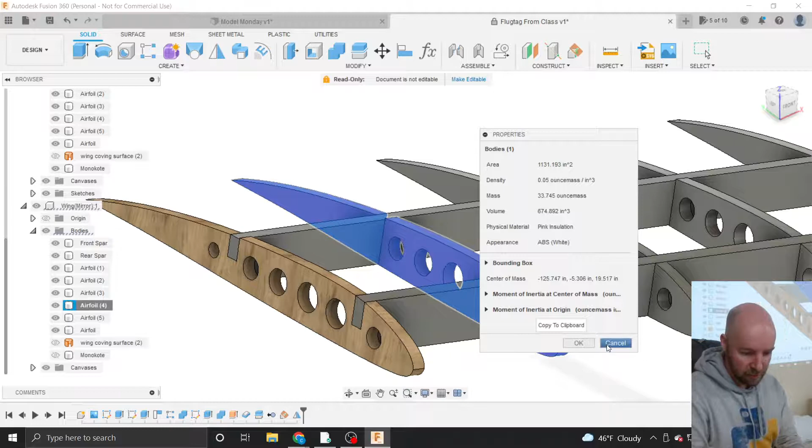So really handy to be able to figure out how much things weigh. There's also a volume here - 674 cubic inches of volume. That's handy if you need to make a mold of something and want to figure out how much material it's going to take to fill your mold. I think there's an option if I choose physical material.

There's also gases here and liquid, so here's water. If I make this airfoil out of water, which I guess would be ice because it's in solid form, let's just assume this airfoil is made of ice. I thought it gave me liters when I chose a liquid, but I might be wrong.

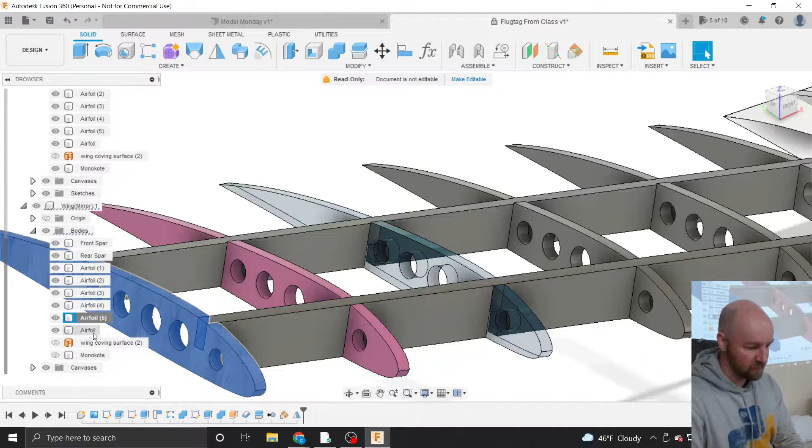Cool, so that's my story. That's it for our making our wing here.

Another cool thing, sometimes it's nice to know where the center of gravity is, the center of mass. You want to know where that wing is going to balance for stresses. Jump over to the inspect menu, click on that, slide down to center of mass, click on that. And I've got my little blob there - should be right in the middle of the wing. That is your center of mass, your balance point.

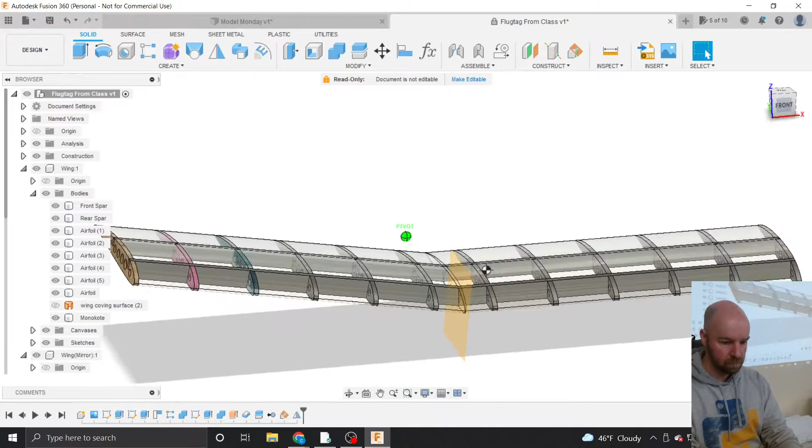Now it's interesting because it's not in the center of my wing. Because, do you want to guess? Because of the way you mirrored it and your modifications. Yeah, because of those materials that I gave - because I gave these things a physical material that have mass and weight, it's changed that balance.

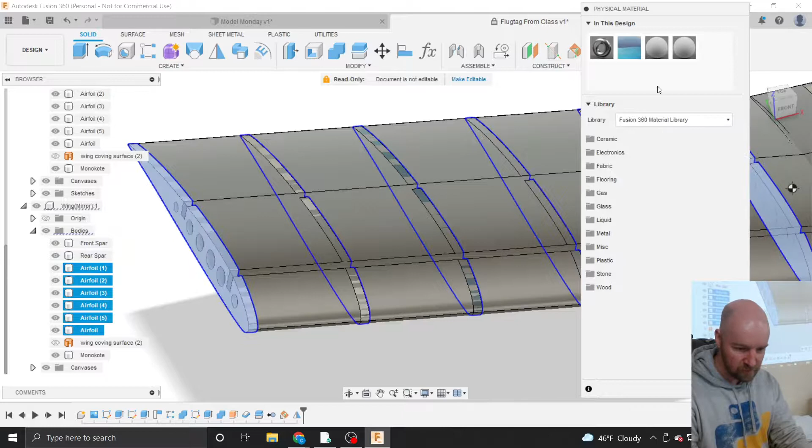So here I'm going to come back to my thing, and here's all of these airfoils - we'll make them out of pink insulation. I'll close that, and now there we go. So now our center of mass has gone back to the center of the wing there.

And it's kind of above the wing. That's kind of interesting, because of our angle. So cool.

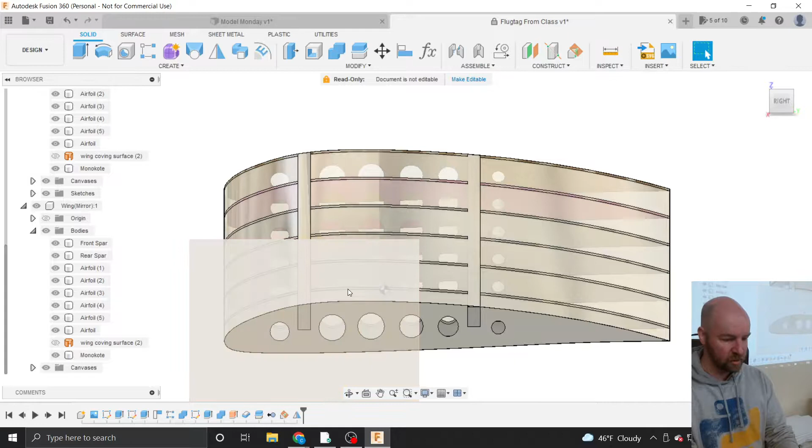And you want on a wing, I think you're trying to get your center of mass to be about 1/3 back from your leading edge. So really our center of mass should be a little higher, forward more, and that just is like a balance thing in order to create lift. So you will need to have some sort of weight that exists out forward of this in order to actually generate some lift, so you're not nosediving.

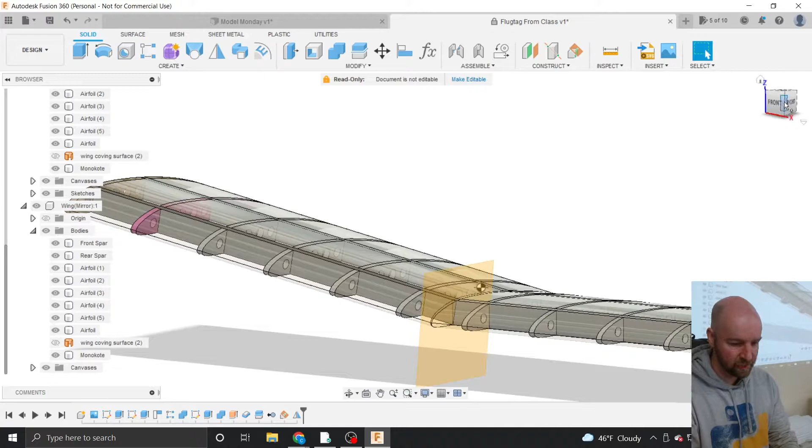Or you can change your hole diameters - I could change my hole diameters, or take a counterweight and stick it out in the front a little bit, or wherever you put your person - they'll be underneath or on top or wherever they're sitting on your wing in our Flugtag competition thing. So you just gotta seat them forward so they put the center of mass where it needs to be.

Yep, that'd work too. Yeah, the length of the wing, yeah for sure. Yeah, that front spar could be thicker - that would change that mass for sure.